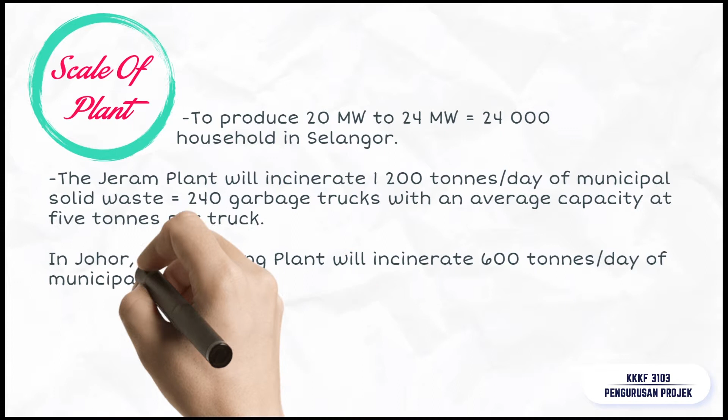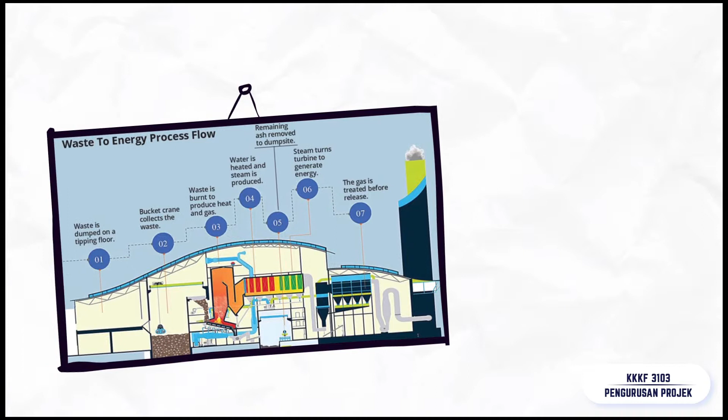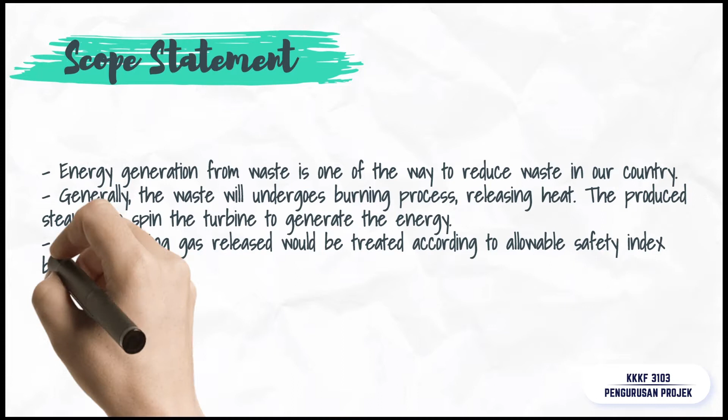The figures show the construction of the waste-to-energy plant. Energy generation from waste is one of the ways to reduce waste in our country. Generally, the waste will undergo a burning process, releasing heat. The produced steam spins the turbine to generate the energy. The remaining gas released will be treated according to the allowable safety index before it is released to the environment. Suitable equipment with the latest technology is needed to ensure that the projects are well managed and will benefit all consumers and stakeholders.

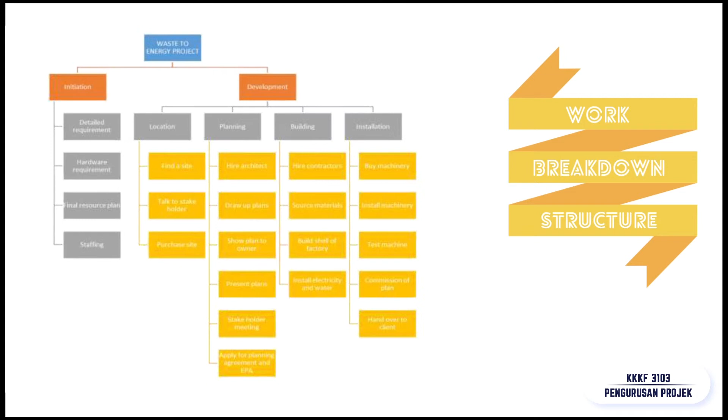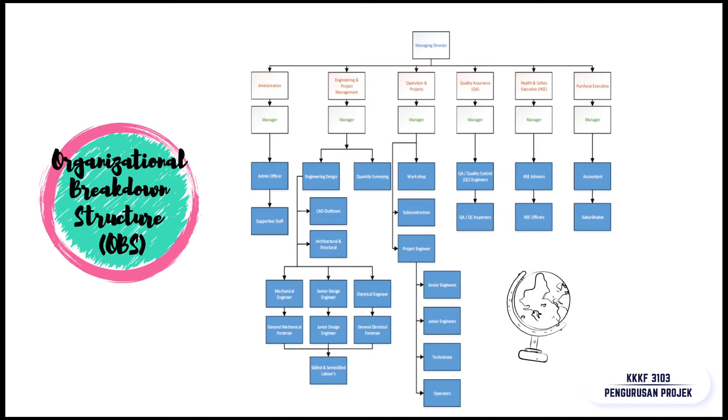Here are some of the scope assumptions. First, staff and trades with the required expertise will be hired. Second, material and equipment will be ordered based on requirements. Third, enough information will be available for initial budget and schedule forecast. Fourth, the detailed description of the project based on the client requirements is in place. The work breakdown structure, or WBS, shows the hierarchical tree structure that outlines the work for our project, whereas the organizational breakdown structure, or OBS, shows the hierarchical model describing the established organizational framework for project planning.

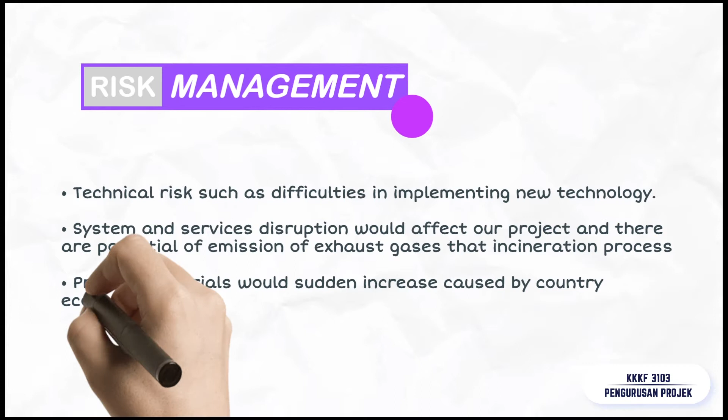Management. There are a few risks that should concern the project manager in order to finish this project. The first one is technical risks, such as difficulties in implementing new technology. Besides, system and service disruption will affect our project, and there is potential emission of exhaust gases from the incineration process. Lastly, there are also risks in the economic aspect, where the price of materials could suddenly increase due to the country's economic issues. There are a few strategies to overcome the risk. Firstly, we may hire experienced workers to lead fresh grads to further study in that field. Then, the risk can be reduced by monitoring and servicing the equipment through annual maintenance.

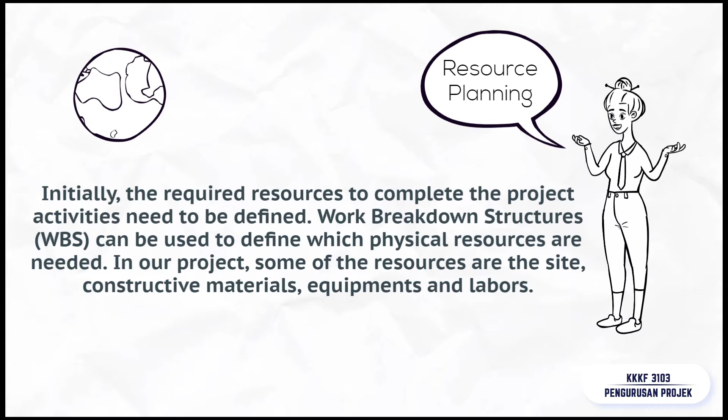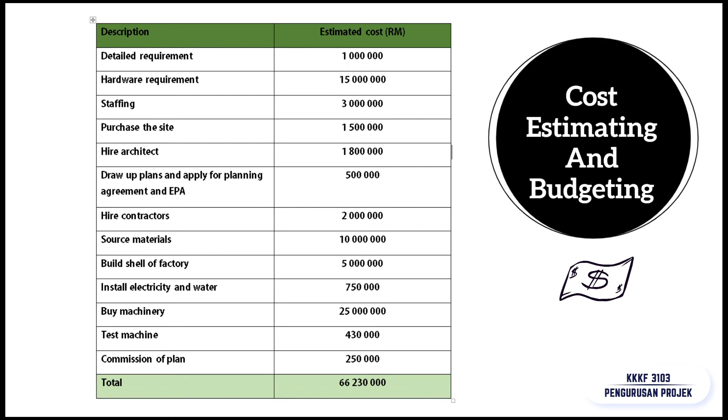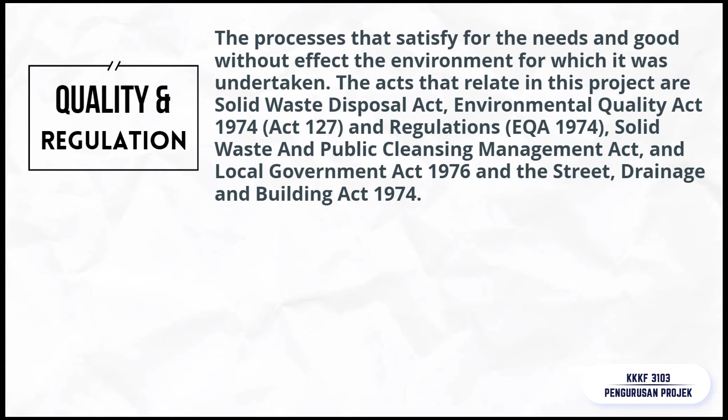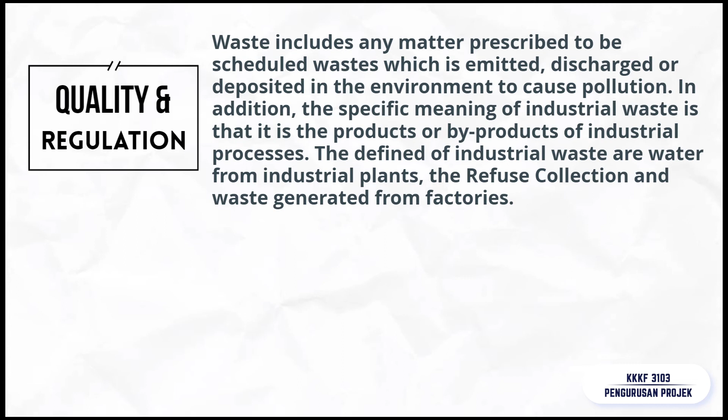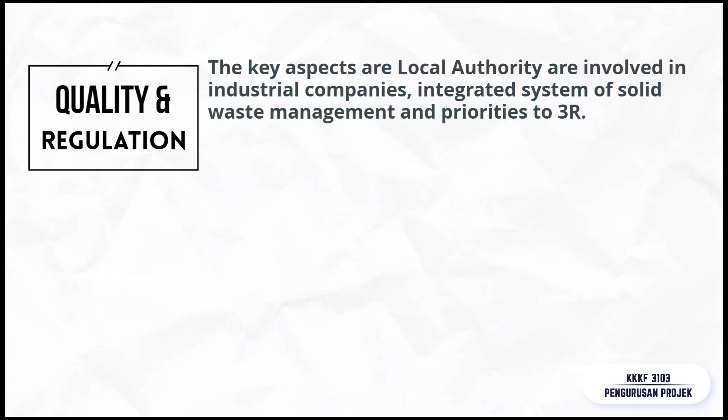Quality and regulation. The process that certifies needs are met without affecting the environment. There are a few acts. First, the Solid Waste Disposal Act. In response, Congress passed the Act as part of the amendment to the Clean Air Act. Next, the Environmental Quality Act and Regulations. Waste includes any matter prescribed to be waste that causes pollution. Number 3, the Solid Waste and Public Cleansing Management Act. The key aspects are that local authorities are involved with industry companies, an integrated system of solid waste management, and priority to the 3Rs. And the last one, the Local Government and Street, Drainage and Building Act. For your information, it is now under the Management Corporation Act.